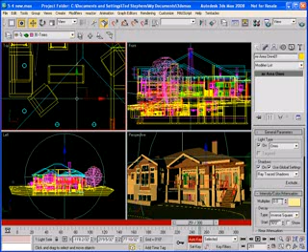I got to turn the auto key button on. It's going to memorize any changes I make to the properties of the light. Then I'm going to move up to frame 251. And then I'm going to set the multiplier of that Omni light to 60. I'm turning the interior light on at frame 251.

Now we're not quite set right yet. If you notice here as I move the slider, the multiplier in the Modify panel is changing. So the light is turned off at frame 0, but then it just gradually goes up to a multiplier of 60 at frame 251. What I want, though, is to have the light just turn on. So I turned auto key off, and I'm moving frame 0 up to frame 251. So I just left-clicked over that keyframe and slid it.

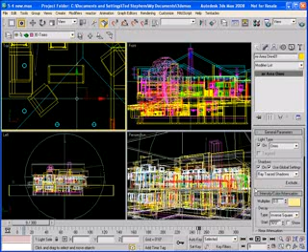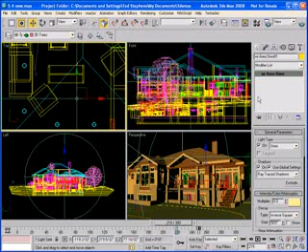So now the light stays off. It keeps that multiplier of 0 the entire time up to frame 250. And then at frame 251, the multiplier goes right up to 60. So in that one frame, we've just turned on the light switch. And then the rest of the animation, the lights stay at a multiplier of 60. So from frame 0 to 250, the multiplier is 0. The interior lights are off. The daylight system will move, though, throughout its whole cycle there. So it's going to go from sunrise to sunset.

So my settings here, I hit F10. In my indirect illumination, just making sure my final gather settings are on. In my Common tab, I'm going to turn on Active Time Segment. I want to render out this animation. So I'm going to change the pixel width and height to 320 by 240 pixels just so it renders quickly. That's a pretty small size.

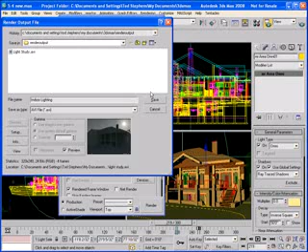Render Output, clicking on Save File. I'm going to click on the Files button, browse out to where I want to save it. We had done the light study in the previous video; basically it's the same setup here. So I'm just giving it a name, Indoor Lighting, saving it as an AVI. I got to make sure my viewport is at perspective view, so I can change that. And then just render it out. So now all 300 frames will render out.

So we'll start with the sunlight system coming up in the morning. The interior lights will be turned off. And then by the time we get to frame 250, it'll be dark. And then the interior lights will turn on.

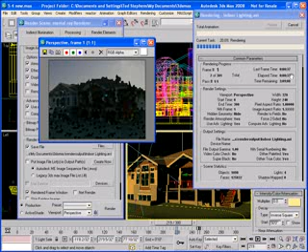So here as this first frame renders out, it tells me it's going to take a little over 3 hours for this to render. So I just let the machine sit there and render. And then when it's done rendering, I just go out to where I saved that AVI file, that animation file, double click on it, and then play it in Windows Media Player. And that's the end of this video.